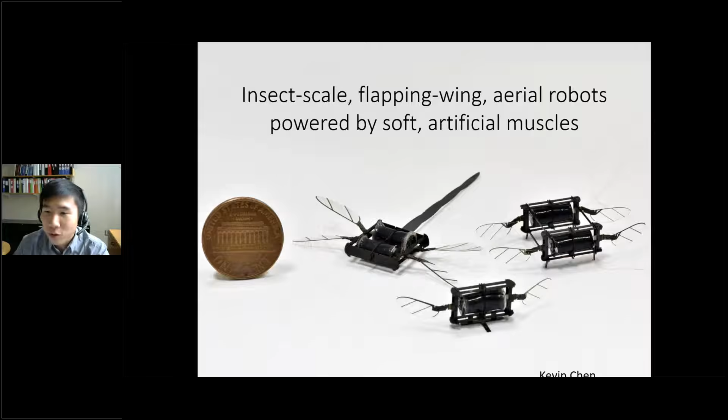So I want to talk about super tiny robots today. And I want to first address several questions together. The first question is, when we talk about tiny robot, what are micro-robots?

When people think about robots, they usually think about large-scale robots, such as trains or airplanes. They span the scale of meters to the scale of hundreds of meters. On the other end of the spectrum, we can think about very tiny robots made with MEMS technology, and they usually range from microns to tens of microns.

What I want to focus on today is talking about insect scale robots, and specifically they range from 1 to 5 centimeters, and their weight ranges from 10 milligrams to 10 grams.

As a quick example, when I was a student at Harvard, I worked on a project called the RoboBee. This project takes inspiration from nature. A bee weighs about 120 milligrams and flaps its wings from 180 to 250 hertz. We created robots that weigh in a similar range and flap their wings in a similar range.

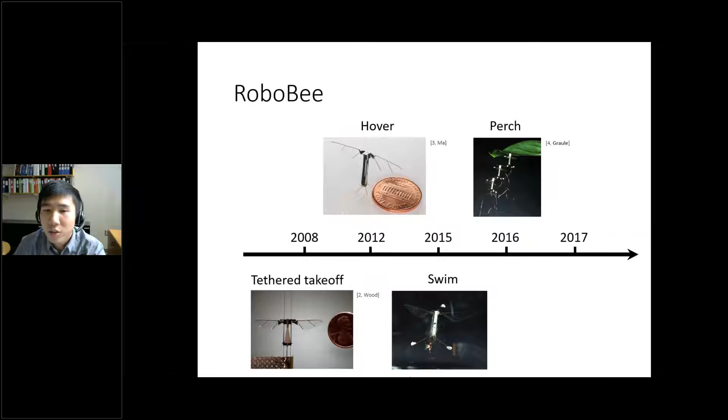If you look at the history of this project, you can see a fairly interesting trend. Starting from 2008, we demonstrated a robot at very tiny scale with enough lift capability to lift off from ground. Then we started realizing interesting functions, such as teaching the robot to hover, to swim, to perch on a compliant leaf, or more impressively, to impulsively transition from water to air through combustion. The interesting trend in our research is that we first implement functions that large traditional robots can do in tiny scale robots, and then think about interesting functions that are challenging, if not impossible, in larger scale robots.

So now let's tackle several important questions together. The first question is, why do we study microrobotics? To me, there are two reasons.

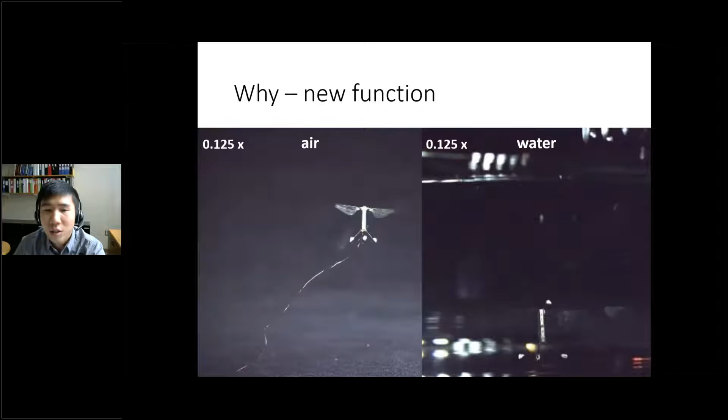The first reason is that we can implement new functions in micro scale robots by leveraging interesting physics at this scale. For example, using the same set of actuators and wings, we show the same robot can both fly in air and swim in water.

More than that, we can also use micro scale robots as a platform to investigate interesting physics at the centimeter scale. By looking at the flow field generated by a flapping wing robot, we can infer about the lift and drag generation mechanism of a small insect.

The second question I want to address is, what makes micro-robots unique? The short answer is small is different.

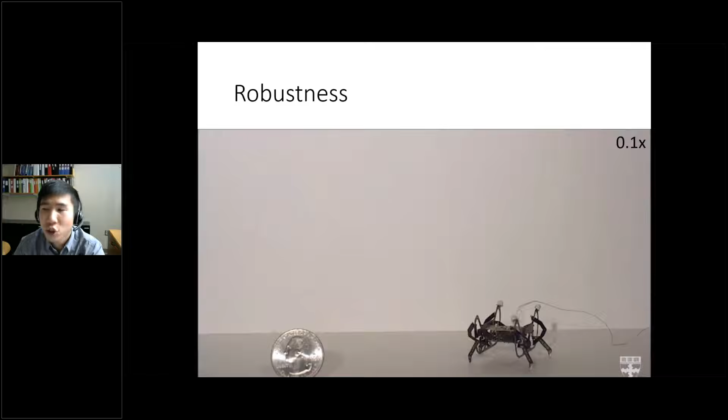For example, you can drop a micro-robot from a meter above, and because the inertial effect is very small, the robot sees very little change to its performance. In addition, because it is small, this robot can leverage surface effect and can jump off the surface of water. Again, something very challenging, if not impossible, for larger scale robots.

The third question I want to address is, what are the potential applications of micro scale robots? In the short term, I would argue there are already very interesting things we can do.

In this video, we put a micro scale robot inside of a turbine engine. The idea is that we want to carry very tiny cameras on top of the micro scale robot, and the robot will just climb inside of a turbine engine, take videos and pictures, and look for cracks on the inside of the engine.

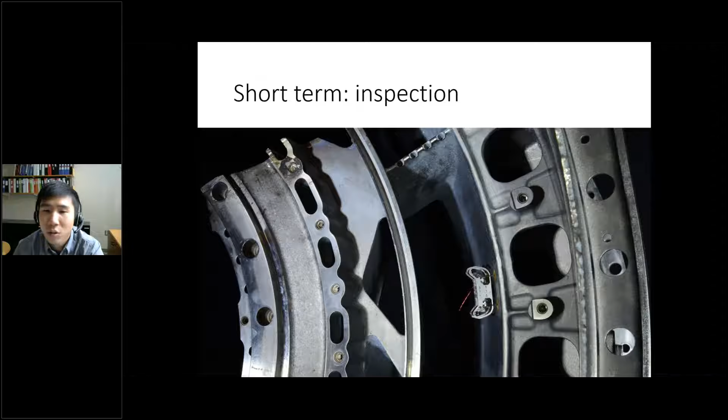In the longer term, what we are hoping to achieve is to use a swarm of micro scale robots and deploy them in a very complex environment to do search and rescue missions. I would say that we are still very far away from this long-term vision, but toward the end of this talk, I'll come back and identify the major challenges and how far we are from achieving those goals.

So what I want to focus on today is introducing 4 projects. I want to tell you about how those micro-scale robots are made, and what kind of physical study we conduct on them to understand how flapping wing robots can generate lift and drag forces.

I want to then transition to talk about new functionality, such as teaching the very tiny robot to be able to both fly and swim, and also thinking about a new class of micro-scale robot, ones that we can use to emulate the functions of small insects.

So let me start by explaining to you how micro-scale robots are made. There are several types of micro-robot that we made at Harvard.

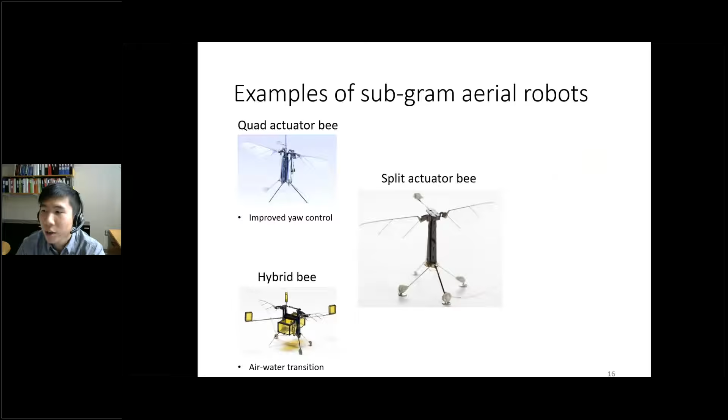There are the basic ones that we use to fly. There are variants that we use, for example, to demonstrate improved functionality in terms of control, in terms of hybrid locomotion in air and water, in terms of carrying more payload. The idea is to carry not only the payload, but also the batteries and the power electronics. But there's also the idea of replacing the rigid actuators with muscle-like soft actuators, so not only can those robots fly, they can also robustly interact with the environment.

The goal we are trying to achieve is, for example, pollination. First, let me focus on the fundamental model and explain how this simple model is made and what are the basic components.

The simple robot consists of several components. It has carbon fiber airframes, wings made of carbon fiber and polyimide, transmissions made of polyimide and carbon fiber, and actuators made of piezoelectric ceramics.

Because this robot is so light, about 4 or 5 years ago we still had to rely on an offboard tether for supplying power and control.

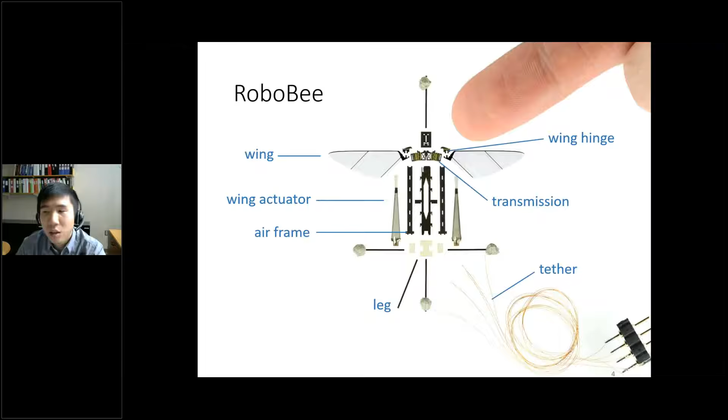If you look at this robot assembly, we assemble the actuator into an airframe, then assemble the transmission into the actuator, slot the wing hinge into the transmission, and finally attach the wing onto the robot.

A unique thing about our robot is that instead of using traditional components such as motors and bearings, we use new actuators such as piezoelectric actuators and new flexures and transmissions.

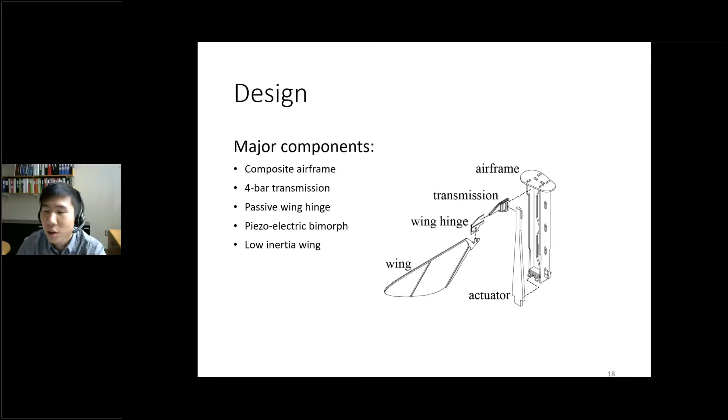Those flexures are made of carbon fiber and polyimide. We laminate multiple layers of composite material together and use the compliantness of the polyimide material as a flexure.

In the next video, we show you how this composite structure-based actuator is working. Here you're seeing an array of piezoelectric actuators that we are trying to command at a very high frequency.

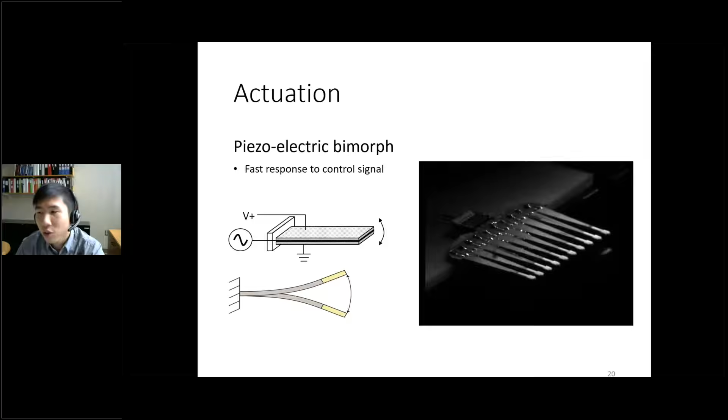About a couple of years ago, the manual assembly process was fairly tedious. It probably takes a couple of weeks to train a graduate student to make a micro-scale robot.

In this video, we are trying to film the student making the entire robot. If we have time toward the end of this talk, I'm happy to come back to this video, which shows you all the manual process for assembling the robot.

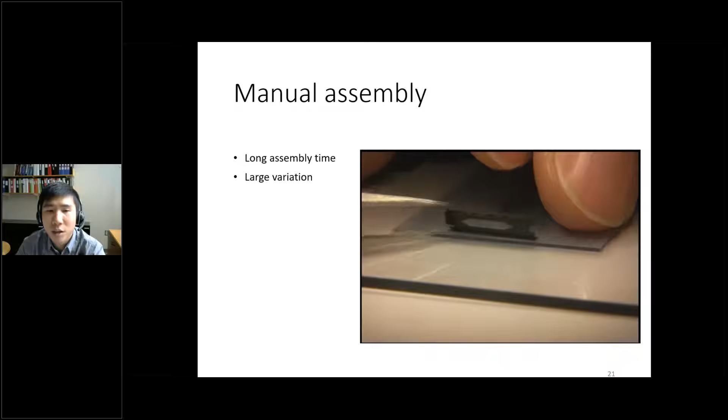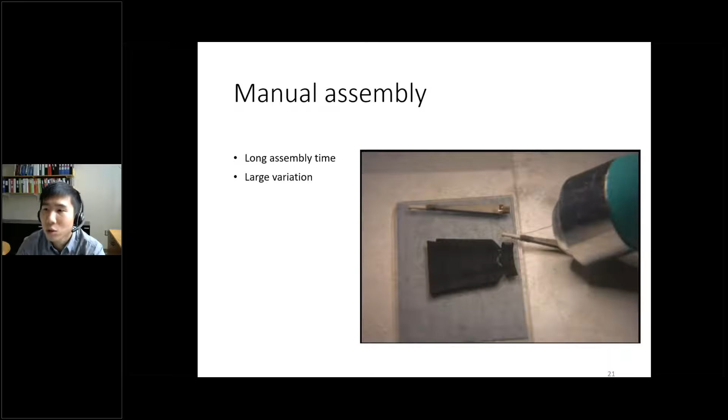This is a great method for prototyping the robot. Once we have a good design, what we really want to do is be able to make a lot of them very effectively. So instead, we came up with a new technique called pop-up.

In this new fabrication scheme, we use the elastic property of the laminate. The idea is that we use the elastic property to assemble the robot without requiring a student.

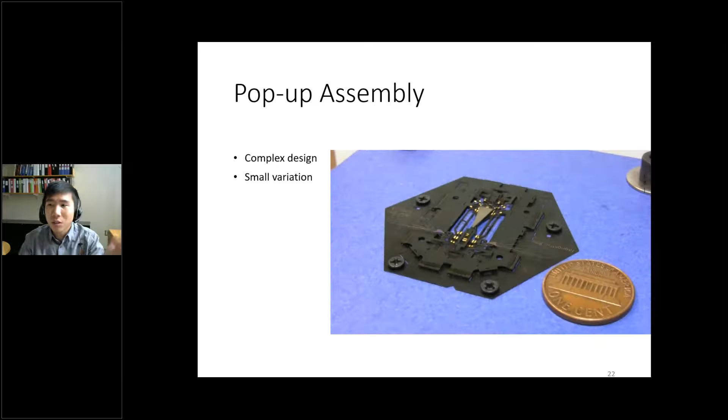In this case, we make several cuts under a laser, and then the elastic material pops the robot into place. That's how we assemble the robot.

Now let's talk about how we characterize the robot and how we understand lift and drag forces that a flapping robot can produce. We've been able to create those robots for about 10 years now.

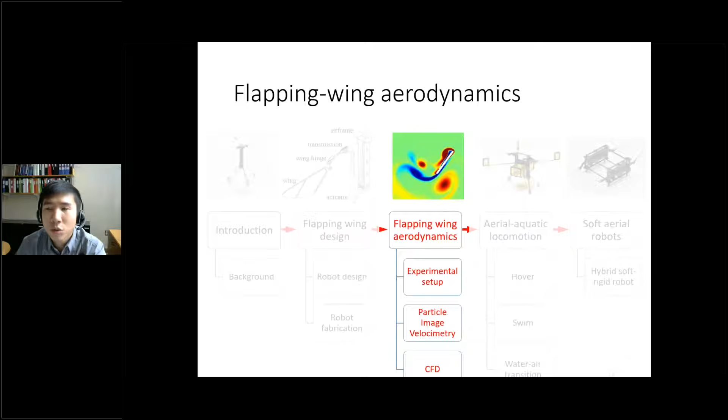The next thing we want to do is improve the robot design so it can carry more payload. Carrying more payload means the robot has more lift and more capability in flight. More generally, we also want to understand the underlying physics so we can generalize what we've learned to other flapping wing systems.

Let's identify the challenges first. To me, there are two major challenges for understanding insect flight. The first is resolving the flapping wing kinematics that often happen at very high frequency - those wings usually flap on the order of 200 to 500 Hertz.

How do we develop a system that allows us to make observations? We also want to observe and measure the force generated by the flapping wing motion, and on top of that, measure the flow induced by the flapping wing motion.

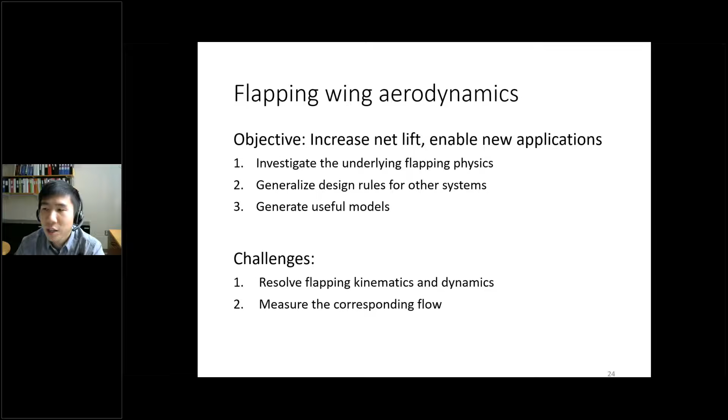So we came up with an experimental apparatus. In this picture, we place a wing driver inside a fully enclosed chamber. We shine a plane laser onto the wing driver, and use a high-speed camera to capture the motion of the flapping wing as well as the motion of the fluid particles around the wing, so we can measure not only the flapping wing kinematics but also the forces and fluid flow.

If you zoom into the platform, you'll see a robot mounted on a 2-axis force sensor, so in real time we can also measure the lift and drag forces. Now let me show you how the robot operates.

In the simplest model, the robot has 2 degrees of freedom. Our piezoelectric actuator drives the wing stroke motion, whereas the wing pitch rotation is passively mediated by the compliant flexure and the interaction between the wing inertia and air.

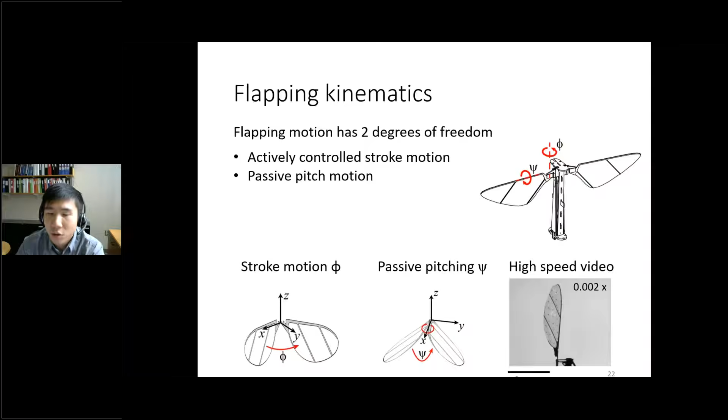We have the capabilities of capturing thousands of flapping wing videos, so we can optimize wing design or the flapping wing kinematics. This is one simple example that's been slowed down significantly. We developed our own motion tracking algorithm, so we can analyze the flapping wing kinematics. By tracking the key features automatically, we can extract both the wing stroke and the wing pitch motion.

To a first order, we can approximate the wing stroke motion and the wing pitch motion as pure sinusoidal functions. So instead of using 2 arbitrary functions to prescribe the wing stroke kinematics, we can prescribe them using 4 kinematic parameters. The wing stroke motion and the flapping frequency are something we have direct control of, whereas the wing pitch rotation and the relative phase shift between the pitch and stroke motion are something we have to rely on the fluid structure interaction for.

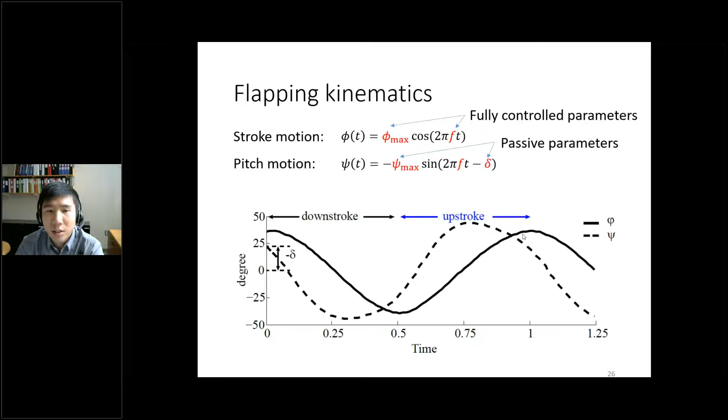There's really a lot of fluid structure interaction we have to study and optimize for. Now, to understand the kinematics, we have to write out models for it. The simplest model you can write out is a quasi-steady force model that allows us to predict the time average forces we are going to be generating from the flapping wing motion.

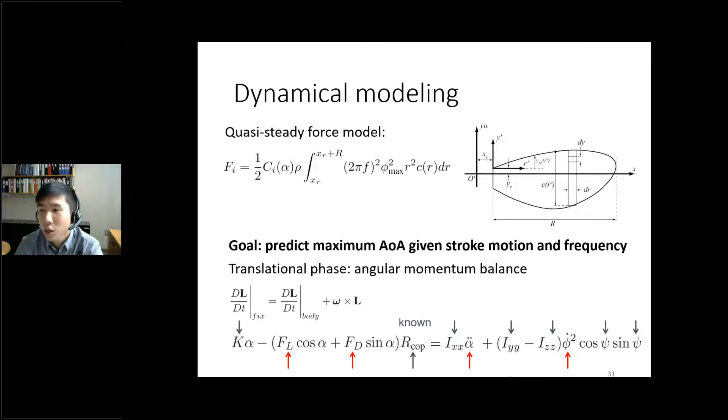Using our experimental setup, we have been able to examine a lot of interesting parameters, such as the influence of wing area, changing wing inertia, changing wing shape such as the aspect ratio, changing the area moment - that is shifting the center of area outward to the wingtip - or changing the leading edge profile, which will induce a large pitch-wise torque change. For the interest of time, I'm not going to focus on those studies today.

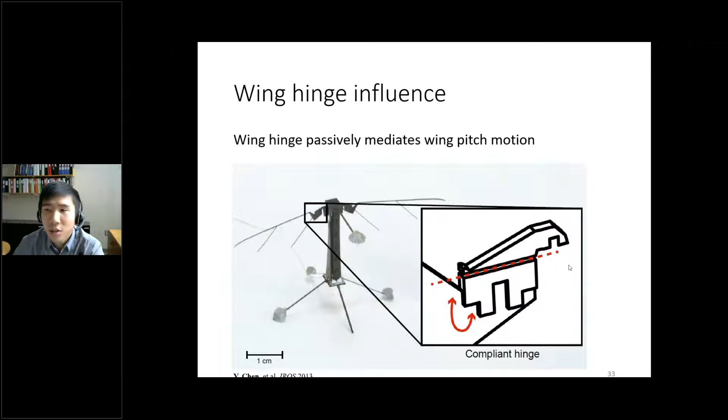I just want to present to you a quick case study of wing hinge stiffness. The idea we are trying to study here is how a change of wing hinge stiffness would impact the efficiency of flapping wing flight. Again, zooming into the wing hinge, it can be approximated as a compliant flexure.

The stiffness of this flexure is proportional to the geometry of this flexure. Through experiments, we realized that just by changing the wing hinge geometry, we can induce a large change on the flapping wing kinematics. You can probably see those 2 videos are quite different, and those are induced just by changing the wing hinge.

Specifically, by just increasing the wing hinge stiffness, we can induce a negative phase shift. And by reducing the wing hinge stiffness, we can induce a positive phase shift.

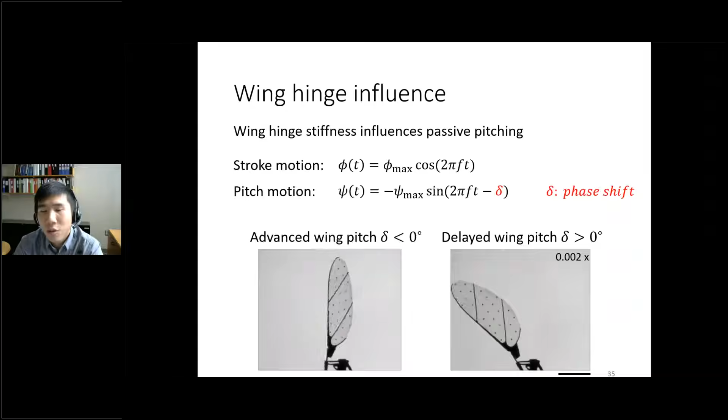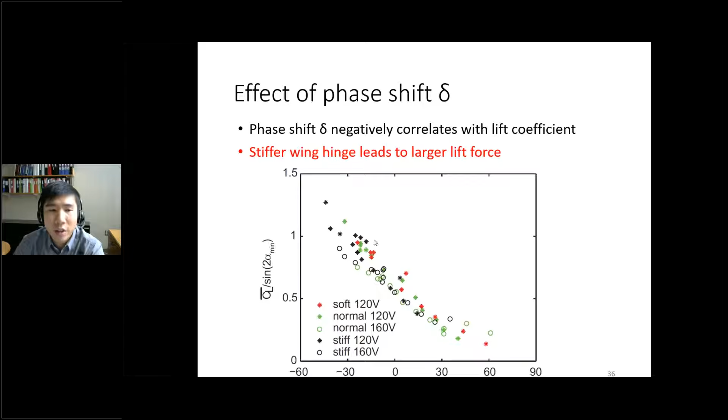Why is this important? Well, if you normalize the lift coefficient and plot it as a function of the relative phase shift, you can see a strong negative correlation. So the very simple takeaway is that the experiments tell us if we, to some extent, increase the wing hinge stiffness and induce a negative phase shift, we can observe a large increase of net lift. That is a very practical takeaway.

But as physicists, we are really interested in why that is the case. So we set out to understand the underlying fluid dynamics. As a consequence, we implemented a numerical solver to solve the incompressible Navier-Stokes equation, and then we integrate over the shear stress tensor to obtain the lift and drag forces.

On top of that, we also want to solve for the fluid structure interaction, so we have formulated a coupled ODE and PDE solver. In one particular time step, not only are we solving for the instantaneous flow field, we are also using the torque generated by the flow field to solve for the wing pitch motion.

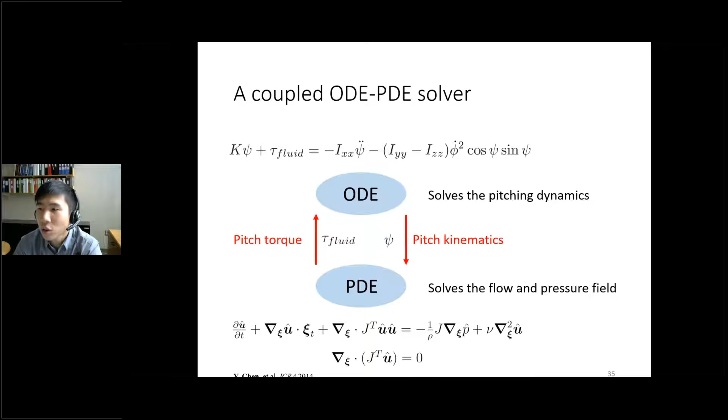First, let me show you a sample 2D simulation. In the 2D simulation, instead of concerning the motion of the entire wing, we just focus on one particular wing chord. We project the motion of this one particular wing chord onto a 2D plane and approximate the rotational flapping motion of the wing as a 2D planar translation.

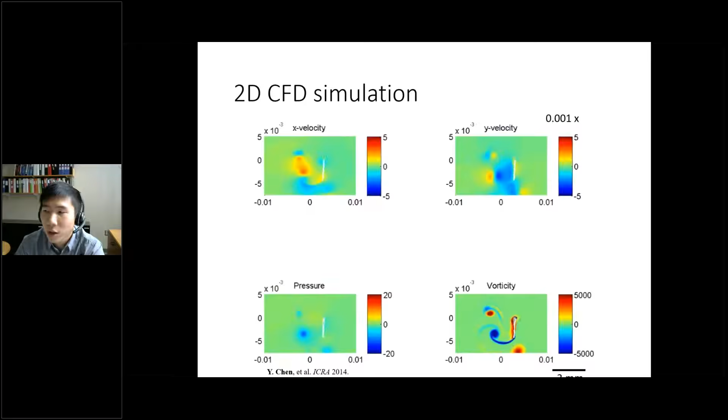Now, this looks like a very interesting simulation, but we also want to validate it. So we conducted at-scale PIV experiments. The idea is to put oil particles in the chamber, use a plane laser to illuminate the flapping wing motion, and observe the flapping wing kinematics.

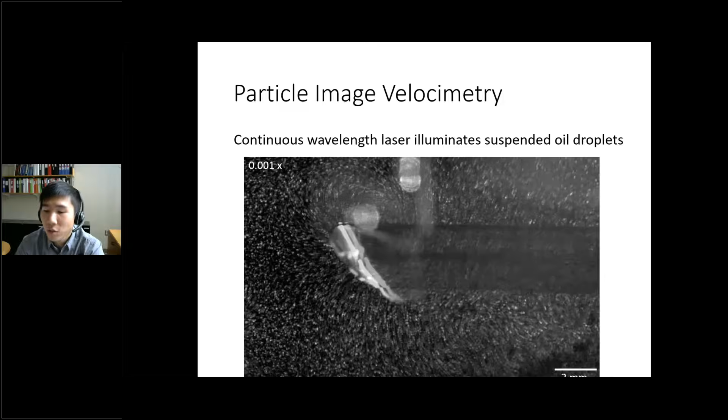So the next video shows a sample PIV experiment, again slowed down dramatically so you can see the motion of those particles. If we compute the cross correlation of this high-speed video, we can obtain the instantaneous flow field. And if you compute the curl of this flow field, you can obtain the isovorticity field.

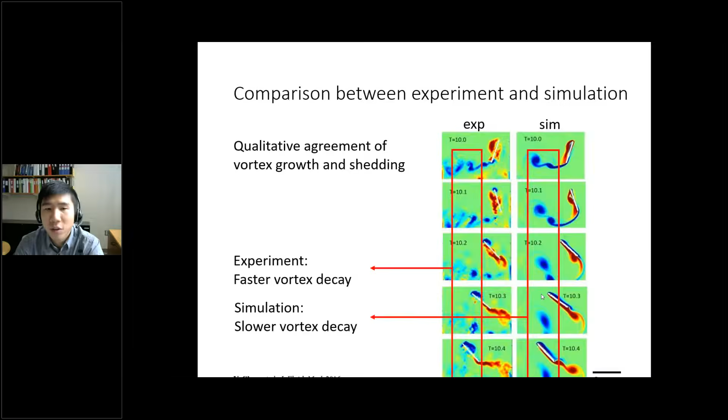And in fact, this key difference leads to a difference in the prediction of lift and drag forces. As a consequence, we realize that the prediction of our 2D simulation usually leads to about a 30% error compared to experimental measurement. That's really contributed by the fact that we are ignoring the rotational motion from the wing. To correct for that, we implemented a full 3D CFD model.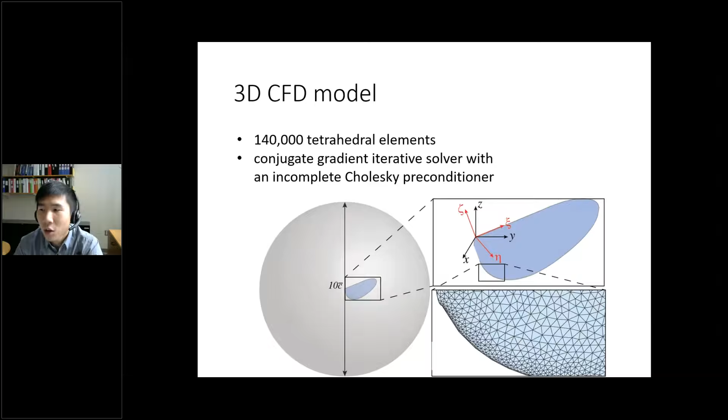In this case, the simulation is much more involved. Based on the 3D CFD model, we've been able to consider the influence of the wing shape and also see a fluid mechanical phenomenon called spanwise flow. Because now the motion is rotational, you can generate a pressure gradient from the wing root to the wing tip, and this spanwise flow contributes significantly to stabilize the leading edge vortex.

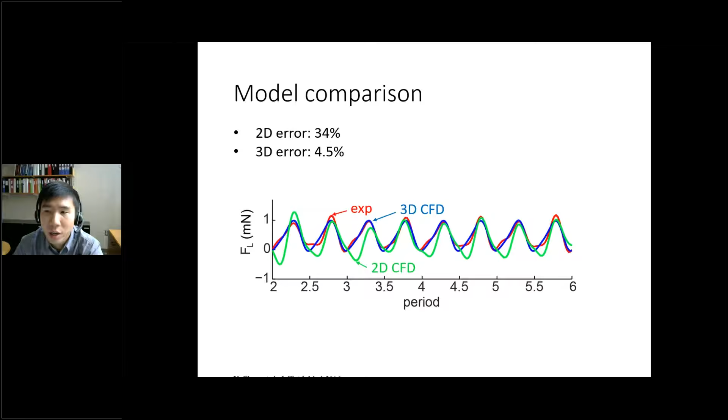But again, a simple takeaway is that by implementing the 3D CFD model, we can dramatically reduce the modeling error. More than that, if we come back to the previous experimental observation and try to justify that using all of the suite of computational and experimental tools, we realize both in experiment and in simulation that the relative phase shift is strongly negatively correlated with the mean lift coefficient.

In addition to observing that negative phase shift leads to larger lift, we can explain the underlying phenomena by observing that this also corresponds to a larger leading edge vortex. From the aerodynamics, if you have a stronger leading edge vortex, that usually leads to stronger leading edge circulation, which translates to a higher amount of forces.

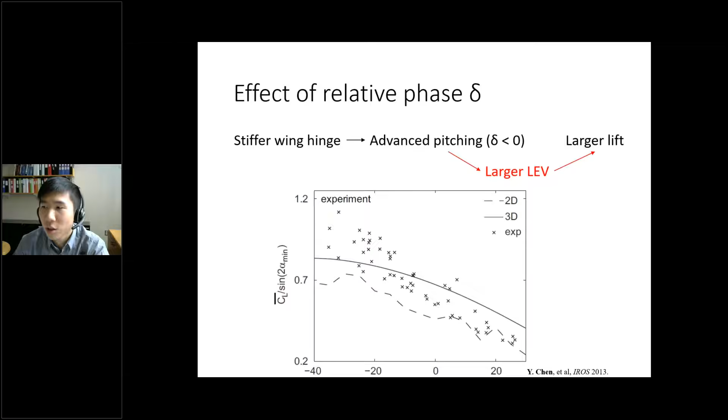Okay, so the main contribution of the first project is really using a suite of computational and experimental tools. We have proposed a new wing design which significantly improved the vehicle payload. This new wing has been incorporated into our new robot to demonstrate new functions, such as carrying an electroadhesion pad to perch on a leaf, or even carrying a tiny camera.

We can also incorporate our new wing design into larger platforms so the robot can carry more payload. In addition, we are excited to see that groups elsewhere are also starting to adopt our wing design.

So the first part of our talk really built the foundation for what I want to demonstrate, right? This is a lot of physics and CFD analysis. Now let's try to use those conclusions to implement some interesting functions in the small-scale robot.

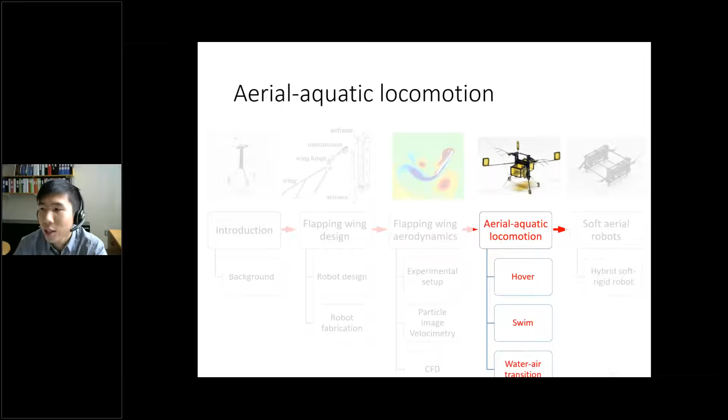In the next project, I want to transition and talk about robot functionality, specifically hybrid aerial-aquatic locomotion. I want to start with a quick motivation. The physics question we want to ask ourselves is: is there any similarity between flapping in air versus flapping in water? And if there is similarity, can we teach a micro-robot to do interesting things?

So we came up with a new project proposal in the sense that we want the same robot to be able to fly in air, swim in water, transition from air to water, and also transition from water back into air. And again, let's identify the major challenges.

To me, there are two challenges. The first is using the same set of actuators and wings to both fly and swim. The second is overcoming surface tension so a tiny robot can transition from air into water and from water back into air.

So let's first address the challenge of multimodal locomotion. We turn to nature for inspiration. Puffins are amazing animals - they can fly in the sky and take a dive into water. Once they're under the water, puffins change their flapping frequency so they can swim around and chase for prey.

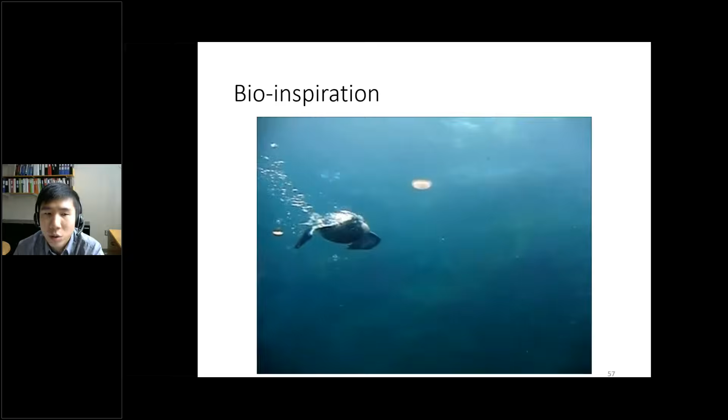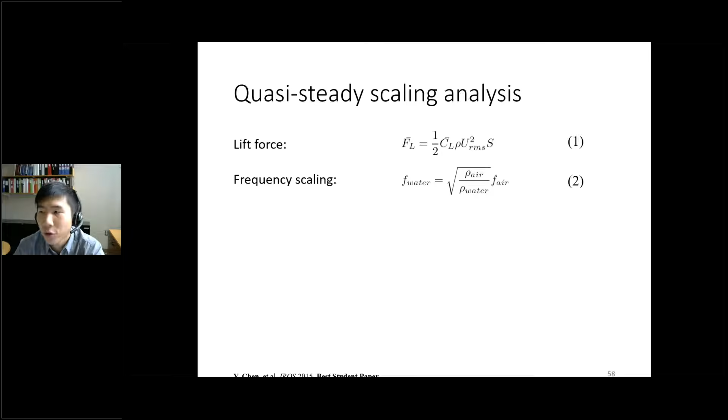Using this similar idea, we proposed a simple quasi-steady analysis that predicts the flapping frequency in water based on the flying frequency in air. Looking at the change in Reynolds number, we realized to our surprise that it remains quite similar. Using our computational tools, we predict the lift and drag forces of these systems to be quite similar in both water and air. Then we conducted flapping experiments.

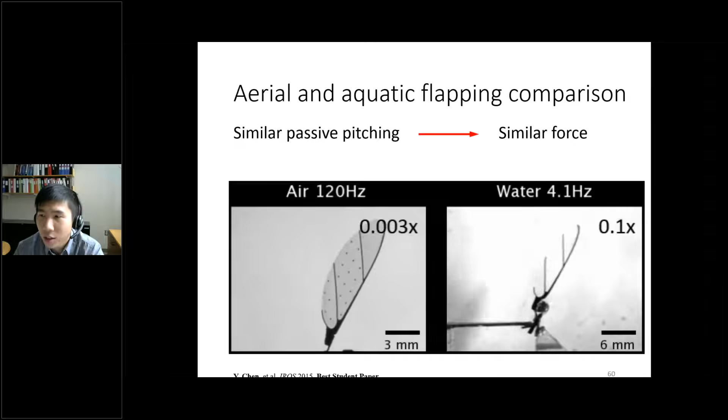The next video really builds the foundation for everything that follows. As you can see, by just slowing down the flapping frequency in water, we can generate similar flapping kinematics. This is significant because the wing pitch dynamics is passive, so the fact that we generate similar kinematics implies the robot can generate similar forces in air and in water.

Motivated by that experiment, we insulated a robot and tried to swim it in water to observe what would happen. Not too surprisingly, the robot can flap around and jump around, but it's not really doing a lot underwater, and it quickly falls over because without control, this robot is intrinsically unstable.

What was surprising to us is that if you turn up the flapping frequency to about 10 Hertz, all of a sudden you achieve passive upright stability, and the robot can passively swim to the air-water interface without any feedback control. That is both surprising and very interesting to study.

We looked at high-speed videos of the robot swimming and realized that as you increase the flapping frequency, the robot's pitch dynamics become smaller, and all of a sudden it has this property of passive upright stability.

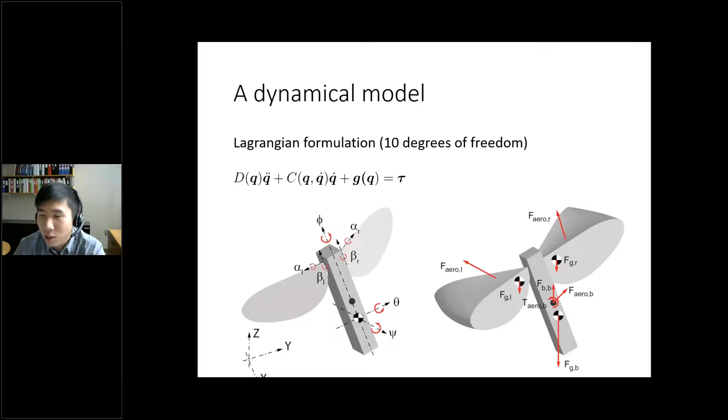We wrote a 10 degrees of freedom model to study the stability property of the robot. For the interest of time, let me not go into the details, but just tell you the key conclusion: unlike flying in air, the drag force on the robot body helps to stabilize the robot in water, allowing it to stabilize without even feedback control.

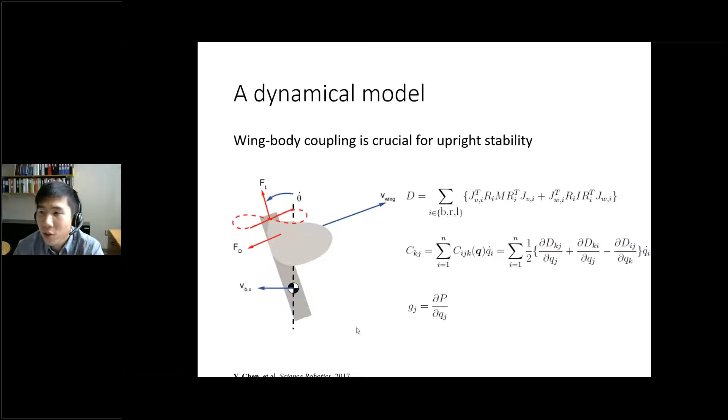So in both experiments and simulation, we've shown that the robot can swim up to the air-water interface without using any feedback control. That is very significant because feedback control is very hard underwater, whereas it is much easier to do in air. So the next question we ask is: can we passively stabilize the robot in air as well? And we can.

But the cost we have to pay is to put huge sails on the robot. One of my colleagues, Professor Sawyer Fuller, now at UW, put huge sails on the robot and showed that without feedback control, the robot can passively stabilize in air. But again, this is something we've been able to do for free in water.

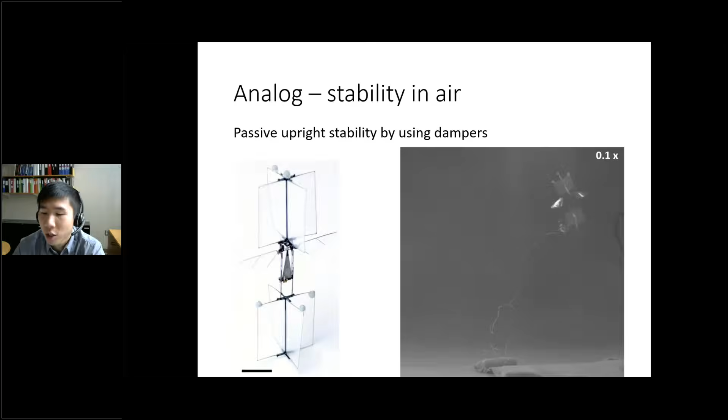About 5 or 6 years ago, we demonstrated for the first time that a 70 milligram robot was able to take off. At that time, it had to plunge into water because transitioning from water into air was very challenging. Once the robot is underwater, we turn it on at a much lower frequency - the flapping frequency reduces from 100 hertz to about 10 hertz - and as you can see, the robot can passively swim to the air-water interface again. That was an exciting demonstration for us.

But in some sense, the robot is still limited - you can see it cannot transition from water back into air again. So now let's address the second part of the challenge, which is trying to teach the robot to transition impulsively from water back into air.

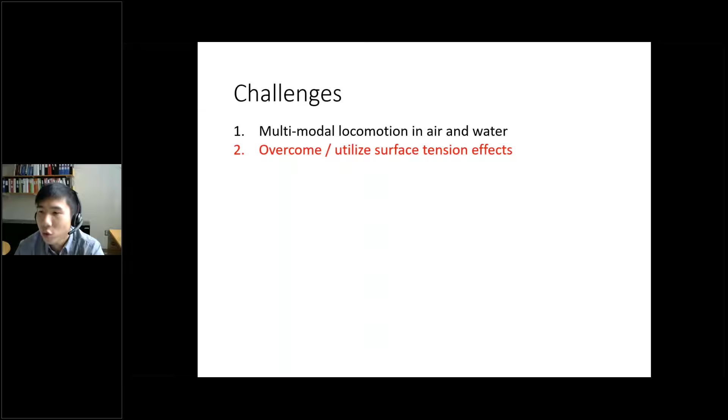Okay, so now let's think about what kind of challenge surface tension would pose for a tiny scale robot. To me, there are two major challenges from surface tension. The first problem is that surface tension pushes down on the robot and causes it to be unstable, so in this case, the robot flips over.

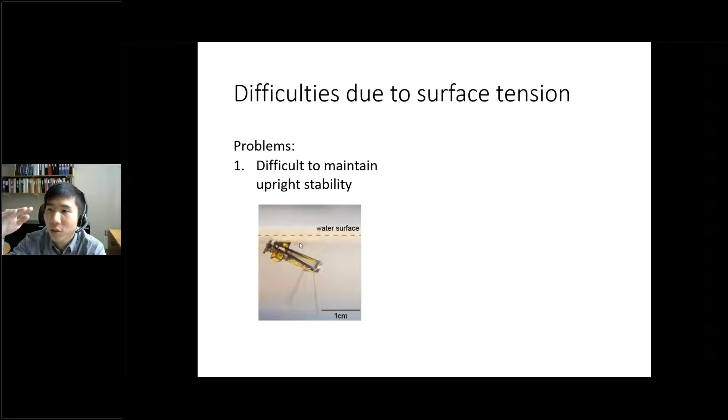The second challenge is that surface tension at this scale is much larger than the weight of the robot. As humans, we barely feel surface tension since it's less than 0.1% of our weight. But for a tiny robot like this, surface tension can be 12 times larger than the weight of the robot, and also 3 times larger than the maximum robot lift. So a simple takeaway is that direct water-to-air transitions through just flapping the robot wings is impossible.

So how do we solve those key challenges? If we want to solve these two problems, let's think very carefully about surface tension. If surface tension is very strong, why don't we use the second problem to solve the first problem? Namely, let's utilize the surface tension to stabilize the robot on the water surface.

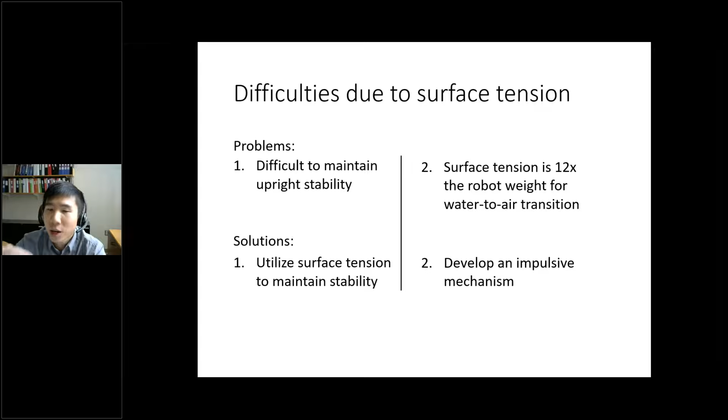To solve the second problem, we realize that although surface tension is very strong, it's singular, meaning it only exists at the water surface. So we developed an impulsive mechanism that can generate a very large force just at the water surface, and we use that large impulsive force to push the robot out of the water.

That brings me to a two-step transition process. In the first step, we use electrolysis to split water into a combination of oxygen and hydrogen. In the second process, we use a combustion process to impulsively ignite the oxygen and hydrogen so that we can push the robot out of the water surface.

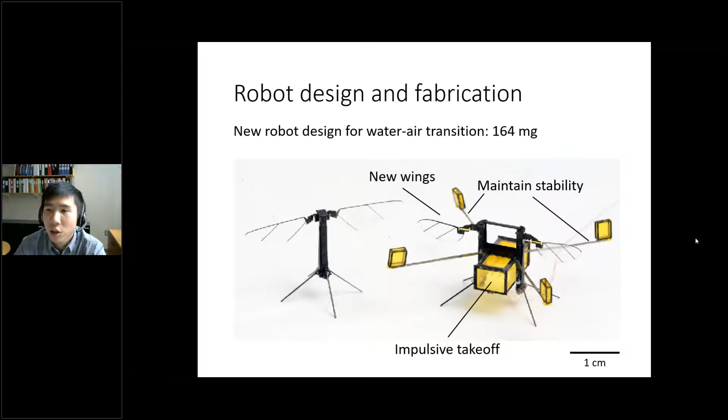Now that brings me to the new robot design. In this new design, we have new wings to generate more force. We have compliant outriggers to maintain stability on the water surface. And more interestingly, we have a combustion chamber which we use to split water into gases, but also as a combustion chamber to generate large impulsive forces.

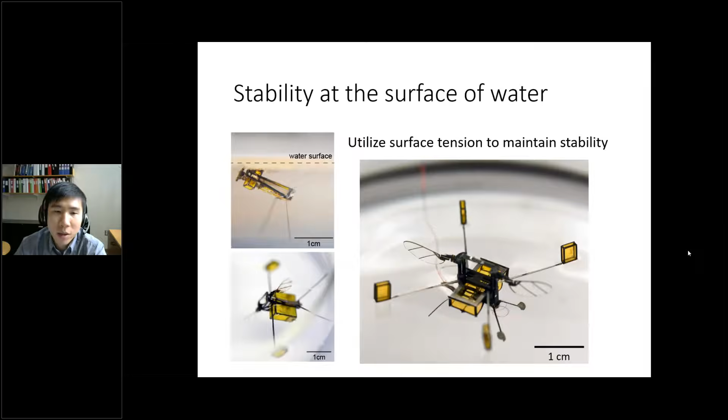So first, let me show you how the robot works. With the buoyant outriggers, we are able to leverage water surface tension effects to stabilize the robot on the water surface. And what I want to spend more time on is showing you the gas collection chamber.

The gas collection chamber is responsible for the impulsive takeoff from water surface to air. If you zoom into the gas collection chamber, it consists of titanium and polyimide top pieces and 4 carbon fiber side pieces. And if you zoom into the center, we have a multifunctional component consisting of a sparker plate and an electrolytic plate.

How does this multifunctional component work? If we turn this component on at a low voltage, the electrolytic plate will start to split water into gases, namely hydrogen and oxygen. Those gases will be captured by the gas collection chamber. Afterwards, we send in a high voltage to the sparker plate, and we use that to ignite the mixture of hydrogen and oxygen.

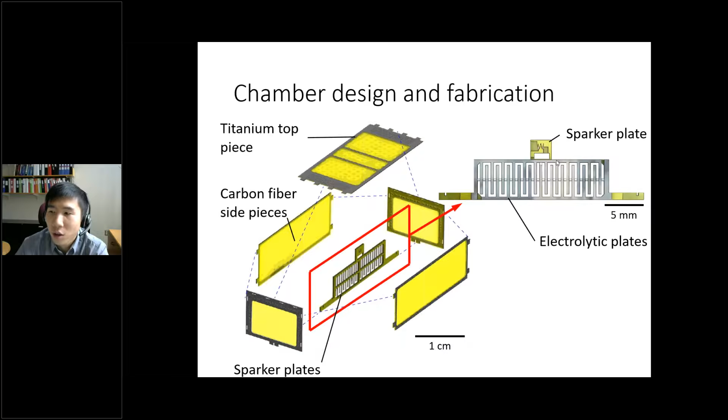Let me show you how this works. First, we turn on a low voltage, and you can see small bubbles in the water starting to form, signifying that the water is being converted into a combination of oxygen and hydrogen, which are captured in the gas collection chamber. Once the chamber is full of gases, we ignite them using the sparker plate. By sending in 200 volts, we generate a tiny spark which ignites the mixture of hydrogen and oxygen.

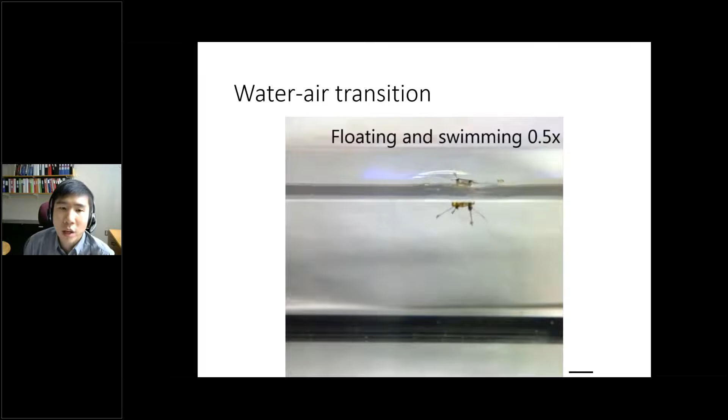Now let me put everything together and show you how the robot works. We start at the bottom of the tank, and the robot flaps its wings to swim to the air-water interface. Once the robot reaches the air-water interface, we split water into gases, and this chamber starts to collect hydrogen and oxygen, with the buoyancy force slowly pushing the robot's wings, transmissions, and actuators out of the water surface.

Once the wings are out of the water surface, we flap the robot for a little bit to dry the robot, and the robot prepares for impulsive transition.

Now I recommend you focus on the next part of the video because it's going to be quite quick. We now ignite the mixture of hydrogen and oxygen, and as you can see, this quick combustion breaks the water surface and pushes the robot out of the water. This combustion completes within 1/1000th of a second and impulsively drives the robot out of the water surface.

We spend a lot of time trying to make sure the robot won't break. Unfortunately, the robot cannot immediately fly after this combustion. It has to land on the ground, take about 5 minutes to dry itself, and then it can fly again.

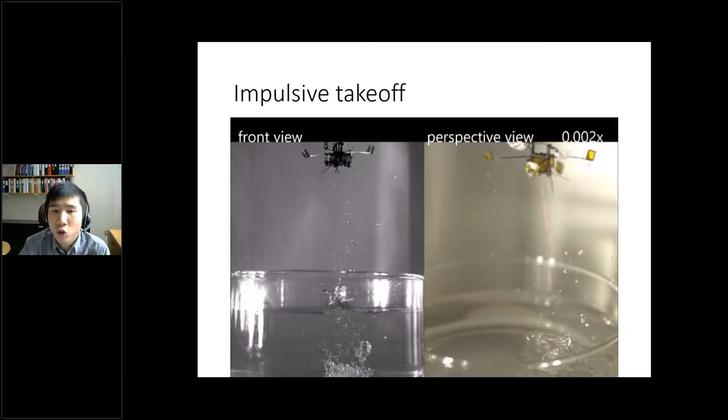Again, I recommend you pay close attention to the next video because it's going to be played in real time and it's very quick. We put the robot in a small beaker and ignite it, and as you can see, this combustion happens within 0.5 seconds. The robot takes off and passively lands on the ground.

Now we are playing the same video at 500 times slower, and you can see the robot takes off and it passively lands on the ground.

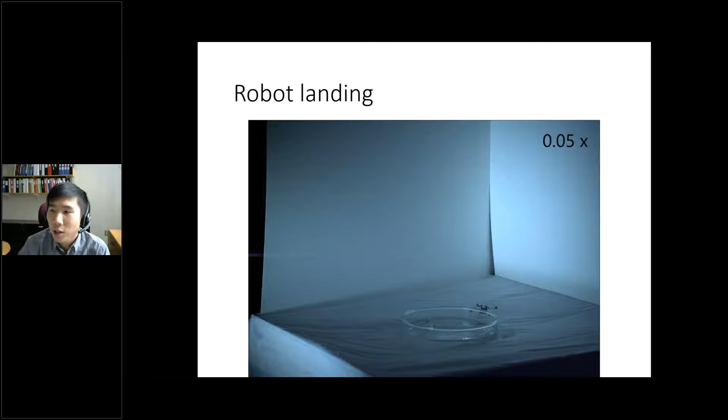To summarize, we have created a 0.1 gram robot that can do multiple things in a fairly complicated environment. Specifically, the same robot is able to fly in air, is able to swim in water, is able to impulsively transition from air to water and from water to air, and also it can passively land on ground.

Once the robot is dry, we can take the robot to air again. So the theme of our research is really that a very tiny robot can do multiple things in a very complex environment.

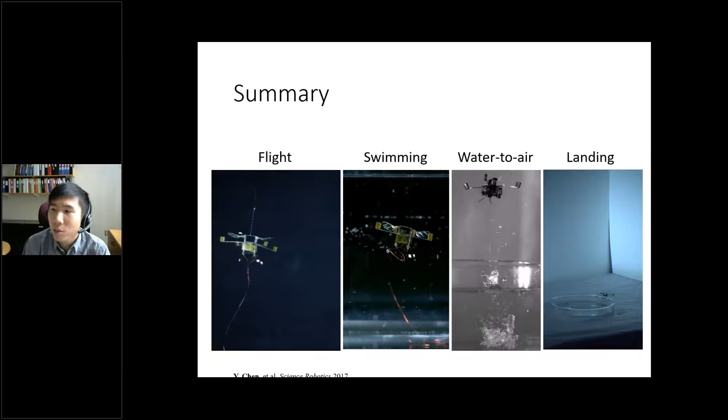So now let me transition to introduce a new project. In this new project, instead of focusing on multimodal locomotion, we now think about a new form of actuation for those tiny robots. Zooming out a little bit, our longer-term vision is to create a swarm of ubiquitous and multifunctional microscale robots that can perform realistic tasks in complex environments.

Whatever robot I've shown you today has been able to demonstrate precise locomotion, and they operate at a really high frequency, but they're still limited in some senses. At Harvard, my colleagues and my previous faculty members are solving key problems in microrobotics.

They are putting in lightweight sensors. They're trying to develop new controllers. They're also trying to put in power electronics for those microscale actuators.

But what I want to focus on today is addressing the fabrication scalability of the robot, and also addressing the fact that microrobots are very difficult to make, and therefore everything I've shown you today involves a single robot performing in a complex environment. How do we scale up the number of robots, and how do we make a lot of robots more efficiently?

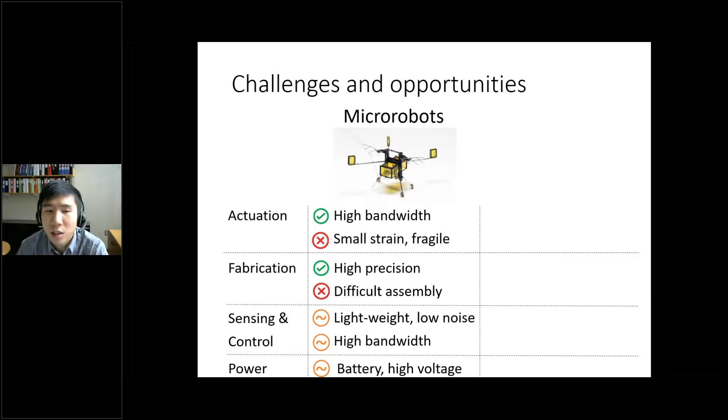I propose that we look into a new direction, a new field called soft robotics. For a very long time, people have known how to make a lot of soft robots very, very efficiently. And soft robots have their own control methods.

In the past 5 years, most of them were controlled open loop, and more recently, people started to use closed loop control for those soft robots. In addition to using batteries, they now start to use pneumatic sources and also chemical sources.

But soft robots also have limitations. Most soft robots' functionalities are inferior compared to micro-robots, mainly because they are unable to operate at a very high frequency. And if you cannot operate at a high frequency at a small scale, you probably will not be able to generate large forces, and therefore the robot wouldn't be able to fly.

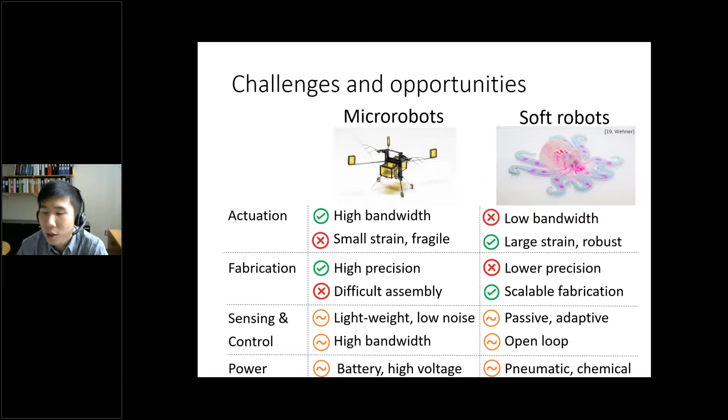So our recent research thrust is to create a new class of micro-scale robot, namely, we want to combine soft and rigid components to make micro-scale robots that are both agile and efficient, but also very robust and capable.

What I want to talk to you about today is a new type of robot that we have created that consists of both very precise micro-scale rigid components for effective interaction with the environment, but also soft actuators that look like human muscles that can operate at high frequency and are robust to collisions.

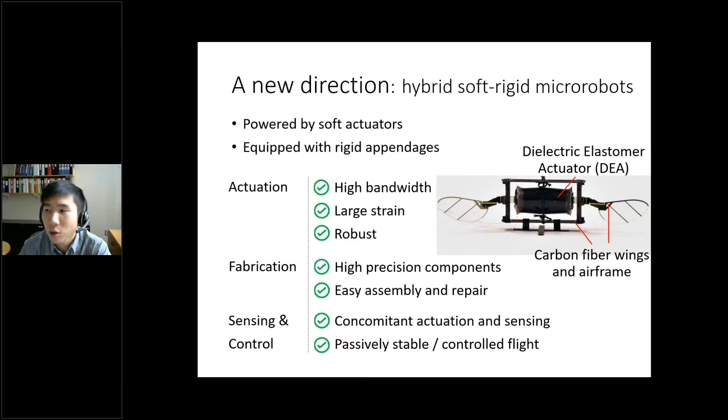So what I want to convince you today is that this class of micro-scale soft robot can not only fly, but also demonstrate new functionalities, such as sensing collisions, surviving collisions, or even aggressive maneuvers, such as performing a somersault in air. First, let me introduce those soft actuators.

For quite a long time, we have played with rigid actuators. Those actuators are great. They have high bandwidth and excellent controllability. One limitation they have is very small motion. As a consequence, we really need to train our graduate students to be very careful in making tiny scale robots.

On the other hand, we can make robust dielectric elastomer actuators that function like human muscles. They can operate at relatively high frequencies, in this case on the order of 500 Hertz, but more surprisingly, they have large strain, which means they are robust to assembly error and can tolerate large assembly error, so soft robots made of these actuators can be made very easily.

We have incorporated the soft actuator into our flapping wing robot, and in this video, you can see this robot flaps at 300 Hertz. This is a quite impressive result in the field of soft robotics - quite counterintuitive to see how soft actuators can operate at such a high frequency.

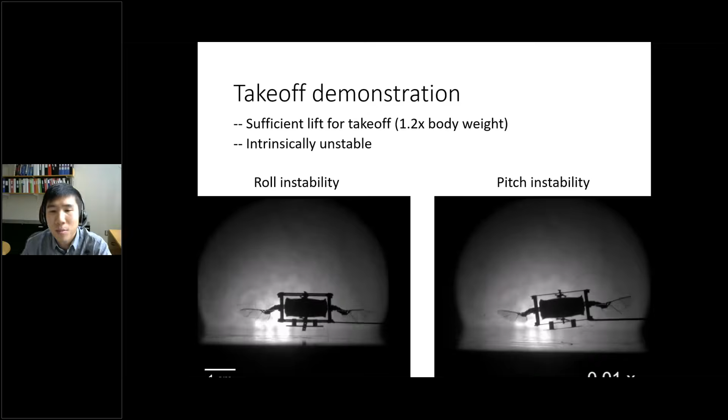We achieved this result about 2 years ago, and motivated by this, we started to demonstrate takeoff flight. As you can see in the next videos, the robot actuator really behaves like muscles - they contract and elongate and push the wings to flap back and forth. This is a very exciting video for us: for the first time, we show that soft actuators have enough power density to enable takeoff flight.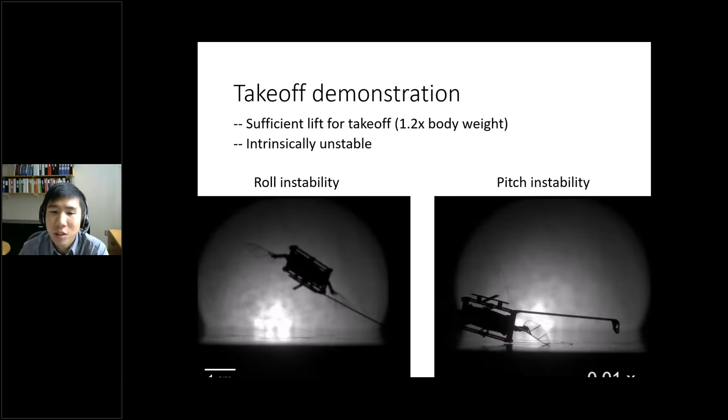But from a robotics perspective, you can also see that this is probably still limited. The robot falls over within about 0.1 seconds and is intrinsically unstable. So from a functionality perspective, this is really not very useful yet.

So the next goal we have is to stabilize this robot. We put two units together and used a phenomenon called precession to stabilize the robot. If we think about our robot as a spinning top, and if we can trigger a very fast spinning motion, we can use that precessional motion to stabilize the robot.

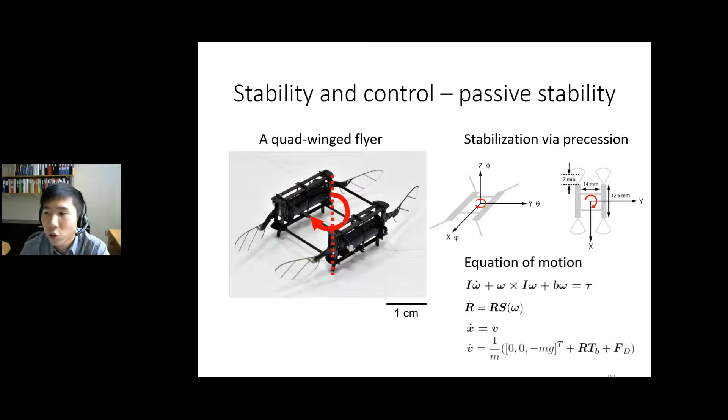To argue about stability rigorously, we have to write out the equation of motion. We have to look at the relative contribution from the yaw torque and the angular speed of the robot. In the interest of time, I'm not going to go into the proofs, but let me show you a sample simulation and experiment.

In both experiment and simulation, we again show that this idea of passive upright stability is extremely important for tiny scale robots. In this case, without any sensing or feedback control, the robot was able to achieve passively upright ascending flight, and that was something quite exciting to us. This robot in this demo was able to fly at a speed of 30 centimeters per second - one step forward towards creating a flyable soft robot.

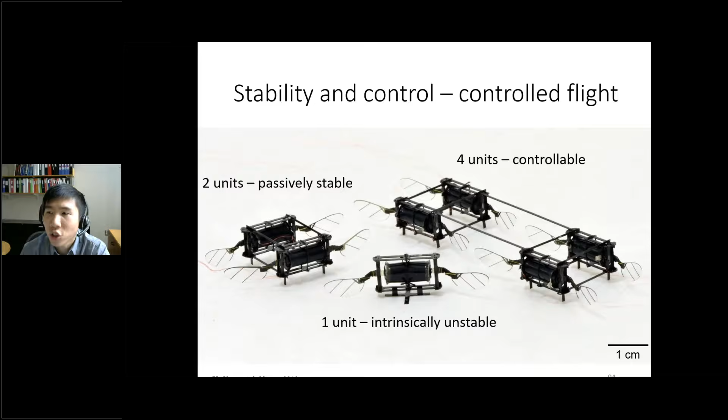But the big question we want to ask is: are soft robots controllable? I've shown you with one unit of our robot, the robot can take off. With 2 units, we can achieve passively stable ascending flight. The key question is, can we achieve controlled hovering flight using this 4-unit robot?

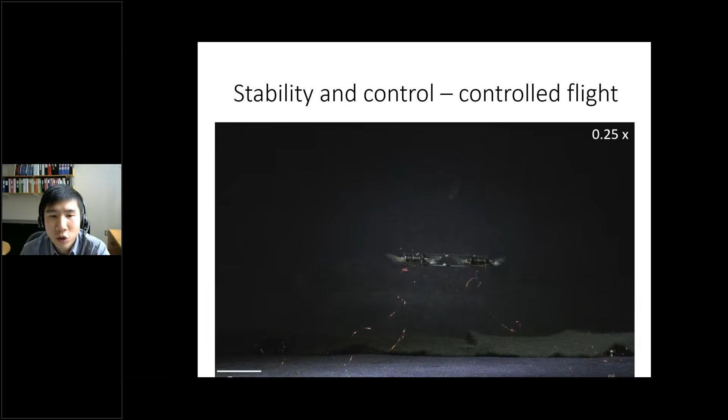So again, let me skip the controller design, and let me just show you a quick video that shows indeed we've been able to demonstrate that the soft aerial robot was able to achieve controlled hovering flight. This was about 2 years ago, when we demonstrated the soft robot was able to hover around the set point.

And as you can see, the robot is still not quite stable - it can hover around the set point, but it drifts a little bit. Toward the end, I'll show you a better hovering video.

In this particular demo, we show the robot was able to fly for about 15 seconds, and it hovers around the set point. The error around the hovering set point was on the order of 3 to 4 centimeters on the X and Y axis, and about 1 centimeter on the Z axis.

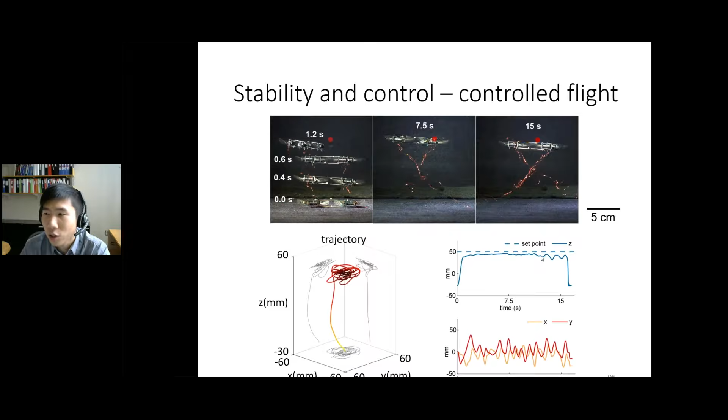We've demonstrated that soft robots can do a lot of the functions that rigid robots can do. Let's now think about new functionalities. A quick thing that I can think about is robustness.

Like insects, we repeatedly run the robot wing into an obstacle, and the actuator sees no damage. In fact, we can detect collisions by measuring the instantaneous current changes in the actuator. So if you're trying to fly the robot, as soon as it collides with an obstacle, we can detect that collision and send in control signals to stabilize the robot.

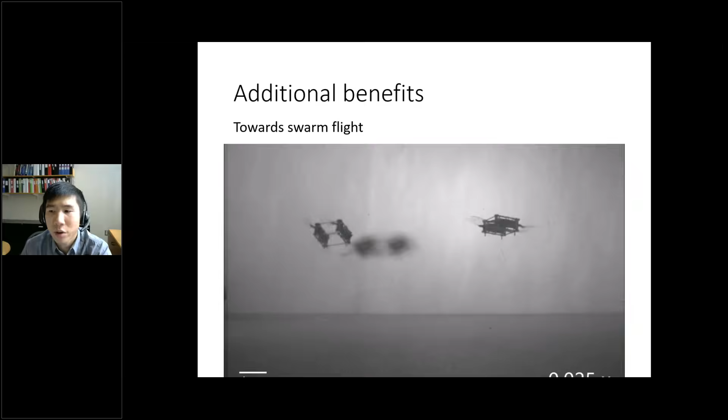With that, we have a more robust platform. We've been able to demonstrate flying 2 robots at the same time. In this case, we intentionally run both robots into a wall to demonstrate they're very robust. Unlike previous robots, where you have to be very careful, here you can run them into obstacles and they see no damage.

In addition, you can try to collide 2 robots into each other. You can see the robots push against each other, and they still survive those collisions. Taking this one step further, we want to implement more functionalities in those robots.

So we take inspiration from the very famous robot at MIT, the mini cheetah. People can kick the mini cheetah and it will recover stability. And the mini cheetah is very powerful, so it can also try to do a somersault in air.

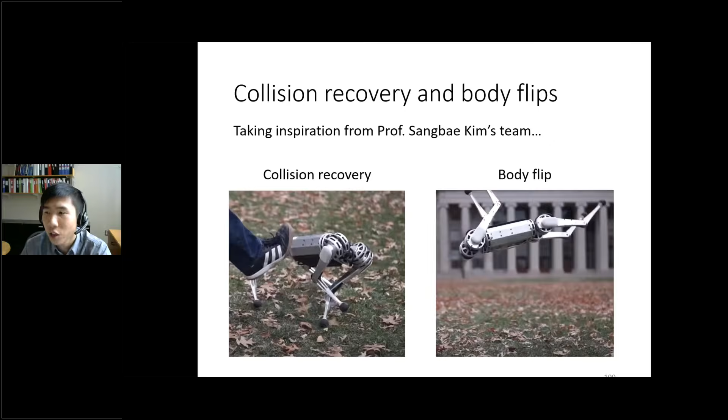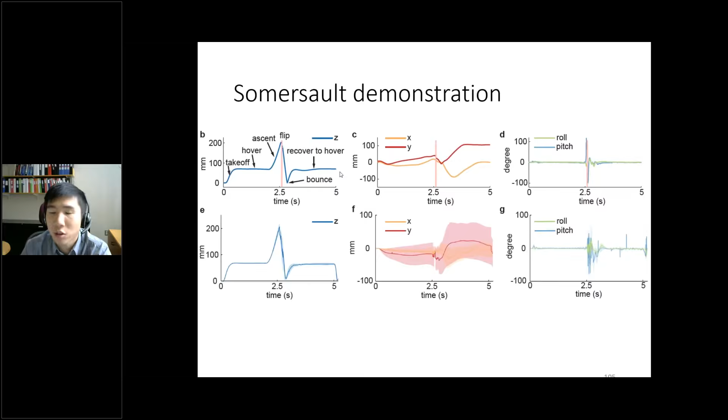In this 5-second hovering demo, we demonstrate the robot's capability to take off, hover, ascend upward, perform a very quick flip, and eventually recover to the hovering set point. In fact, we can repeat this demo 5 times to show the robot can survive collisions and is very robust. So in summary, we have created a soft robot that is both robust and agile.

By robust, we mean the robot can survive in-flight collisions, and by agile, we mean that the robot can do very aggressive maneuvers, such as a somersault in 0.15 seconds, or it can also fly at a relatively fast speed up to 70 centimeters per second. Now, it may not be fast compared to large-scale airplanes, but considering this robot has a length scale of 1 centimeter, thinking about how small it is, this is really a quite fast flying speed.

Let me very briefly say that our goal, in addition to making a robust and agile robot, is to demonstrate the robot can be very precise, long endurance, and power autonomous.

So this is a very recent video that we are able to achieve. As you can see, the robot flies for 20 seconds, and now the flying motion is very stable. The attitude error is about 2 degrees, and the position error is about 1 centimeter. So we are really spending a lot of time to improve our small-scale robot.

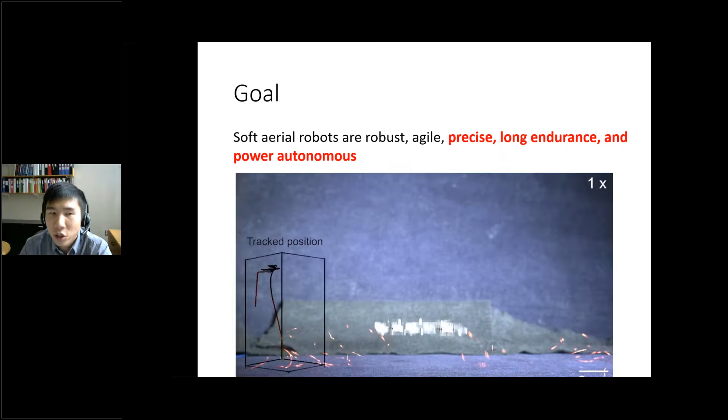Finally, just a few words on power autonomy. We acknowledge that soft robots are still inferior compared to rigid robots in terms of power autonomy. If we compare with the state-of-the-art rigid robot, we realize that soft robots' power density, lift-to-weight ratio, actuation voltage, and efficiency are way lower, which poses a significant challenge for achieving power autonomy.

But we are improving quite quickly. Over the past 2 years, we've been able to improve the power density of soft actuators and the lift-to-weight ratio of our robot. Very recently, we will have work coming out, hopefully in the next month or so, that shows soft actuators' power density and lift-to-weight ratio is catching up to the state-of-the-art. And more impressively, the actuation voltage is significantly lower, to about 500 volts. That really creates a lot of opportunity for us to create power autonomous circuits, or power electronic circuits, for those tiny robots.

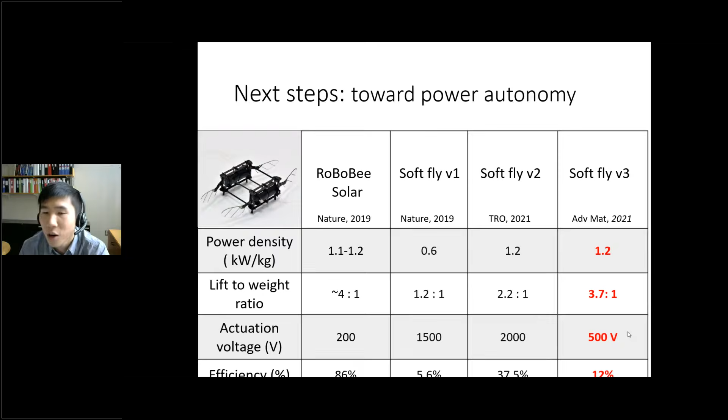Finally, just to talk about future directions. Some of the things we are pushing for in our lab is to create a multiple wing robot. Dragonflies are something that's very fascinating. I'm always very interested in studying the aerodynamics of multiple wing interactions.

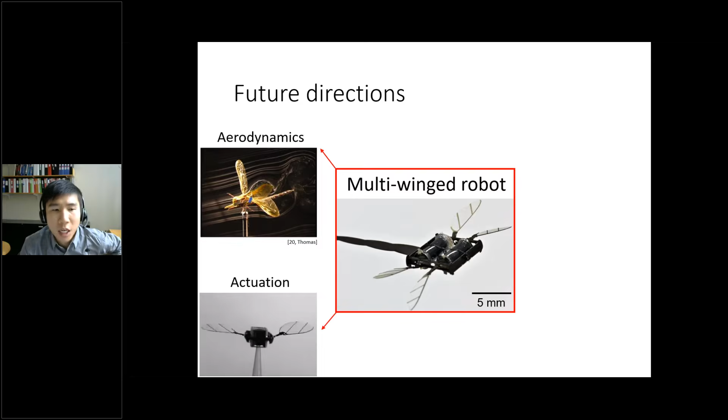We are collaborating with Professor Rob Shepherd at Cornell to look at a combustion powered robot. In this case, the robot is powered by compressed air, and it was flapping at 165 Hertz.

We are thinking about collective flight of a large number of robots. In fact, we have a small flight arena set up at MIT just a few weeks ago. So when you guys have time, you're definitely welcome to come to us, and we are happy to demonstrate controlled hovering flight for you. What we want to do in the long term is to be able to fly multiple of them controllably in the flight arena.

And finally, we are also thinking about multimodal locomotion, that is, training the robot to do multiple things in complex environments. Finally, I just want to zoom out and think about this long-term challenge of deploying a large number of micro-scale robots in a very complicated environment.

I would say that we are still very far from it, but also think about the promise of using a large number of micro-robots. If we have a robot that has 10 kilograms of payload, that would translate to carrying over 100,000 micro-robots. Imagine using up to 100,000 of those micro-scale robots to collectively sense or search for survivors in this very complicated environment.

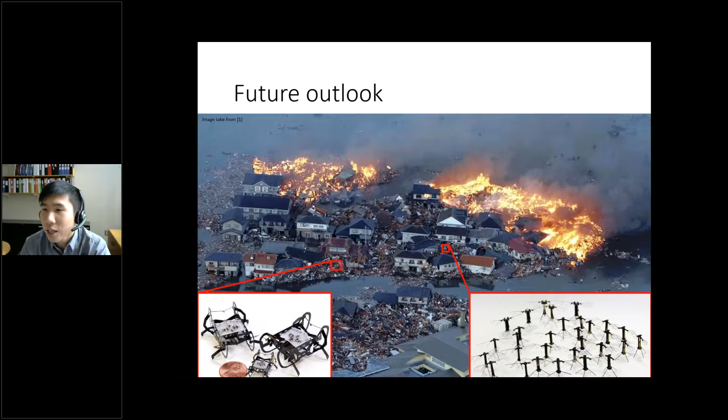I would argue that the next 10 to 20 years is going to be a very exciting time for people working on those micro-scale systems and thinking about applications of those micro-scale systems. So with that, let me end here, and I'm happy to take questions. Thank you.

Wow, thank you, Professor Chen. That was absolutely fascinating. Now it's time for the surprise pop quiz on some of those equations you were showing. All right, just kidding. So we probably just have time for a couple of questions. We have a couple here, one's pretty short, and the other one will be interesting to hear the answer to. This was one of the more fascinating topics we've had on a direct usage basis. It's been cool to see the videos. So thank you, Professor Chen.